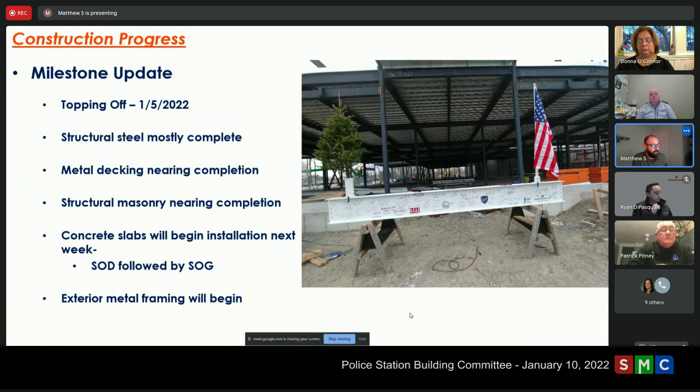And then, as Neil had pointed out, slab on deck will be following next week, and shortly after that, the slab on grade will be completed as well. Running concurrently and just behind that is the light gauge metal framing, so you'll start to see the bones fill into the skeleton over the next few weeks, and it'll start to really take shape as a building. Once those pieces are complete, the finishes will start to go on - insulation, exterior cladding, waterproofing, and the like. So this will be getting closed in pretty soon.

Just as a quick note on the construction progress - just over 5.8, just under $5.8 million so far. The construction contract has been completed as of the end of December, and that represents about 20% of the construction, so we're about one-fifth of the way from the building completion - the overall construction project, not just the building itself. Still tracking no delays to the schedule. We've had really good weather, so that's been really helpful and beneficial to keeping the project moving forward and on track. We also have no change orders to present this month - last month we had change order 1, and we don't have another one to present to the committee this month.

Just as an anecdote, a little bit of what we've been doing behind the scenes - we're just over 350 submittals and shop drawings that have been completed to date, and 68 RFIs have been reviewed and processed to date as well. So there's not a whole lot outstanding at the moment, but we've been pretty diligent about making sure these are getting processed and closed out. There's been a lot of work behind the scenes to keep the construction moving forward.

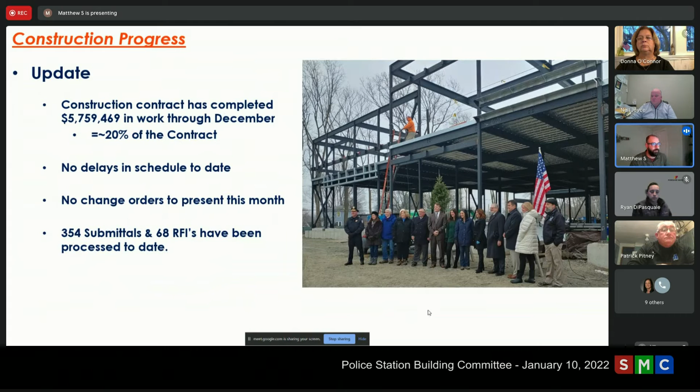Just a quick walkthrough through some of the progress so far. This is as it was just last week, right after the topping off ceremony. And this is the front of the building.

Structural steel is mostly completed. The elevated deck is installed and being prepped for concrete. Over the next week or so, most of the trades will be making their penetrations and blocking that out so that the slab pours can begin.

Some of the things you're seeing here, the steel that's hanging off, this is some of the precast supports. We had some precast detailing around some of the larger windows, and these are the shelves that'll be carrying some of that material around.

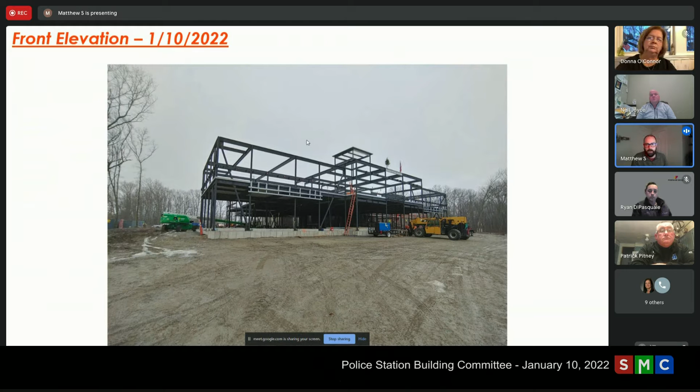And then the light gauge metal framing, as the infilling of the structural steel occurs, they'll also be doing the light gauge roof trusses as well, and that'll start to fill in the roof structure above.

Taking a walk inside the building, we've shown this area a few times in the updates, and again, this is the dispatch area, one of the more heavily detailed and coordinated portions of the building. You can see by the amount of pipe that's poking through where the slab is going to be that there's quite a lot of conduit, data, and power going into this area. It's one of the more heavily coordinated portions of the building.

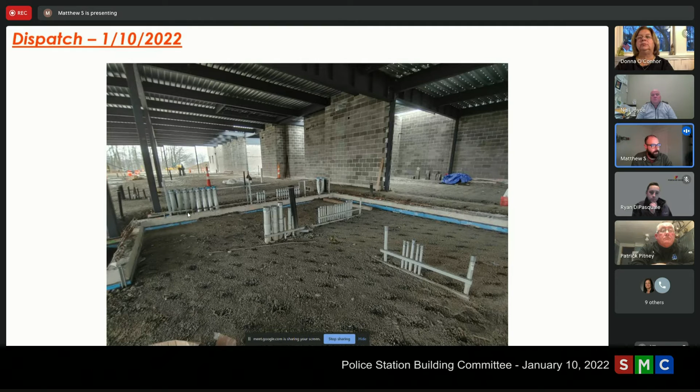You'll notice the foundation walls running inside the building here, and that's because we have that depressed slab in the dispatch area, so we can have that raised access flooring. That's why you're seeing this sort of drop in the foundation here.

Just looking off to the right, this will be infilled with walls eventually, but this is essentially where the evidence storage area is going to be. Again, communications equipment and dispatch here.

This is the edge of the elevator pit, and then just beyond that is the stair that goes out to the north portion of the site where the plaza is going to be, and the training room. This area here is the evidence storage and receiving area, and then there's a small electrical closet here as well.

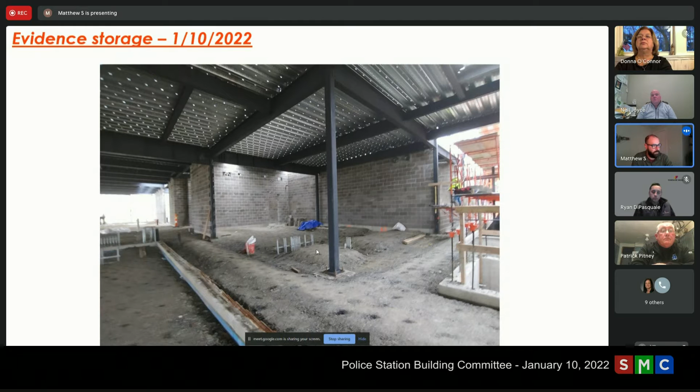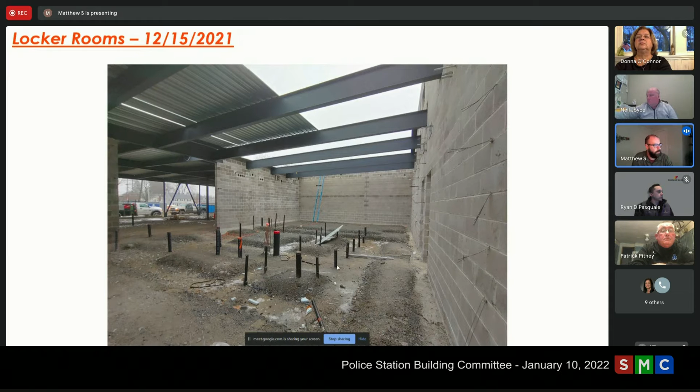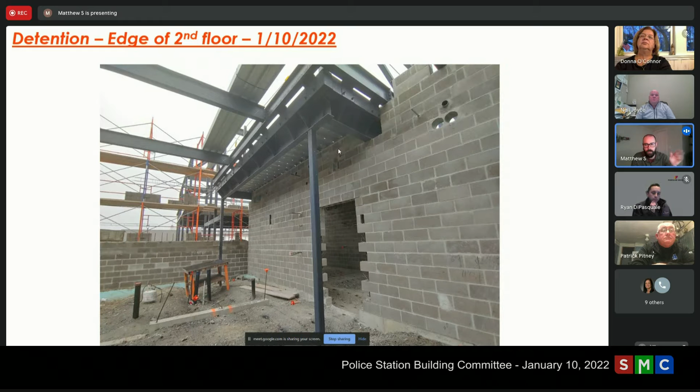This is just an interesting detail that you'll only get to see at this point in construction, but this is the detention area here. And this is actually the edge of the second floor portion of the building that's just poking out here. This will eventually be all covered up, but it's an interesting detail.

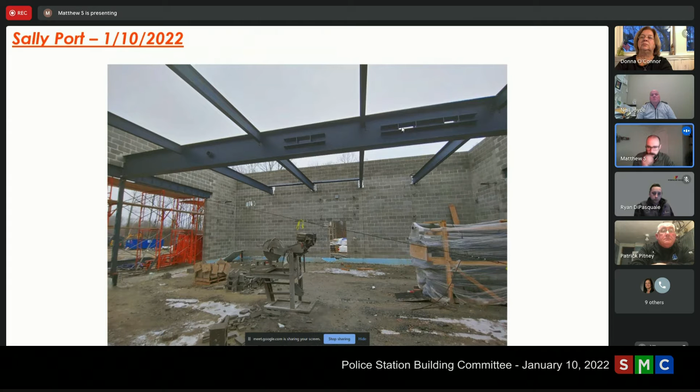The back wall here is where we have a small radio communications network room that's going to be taking the cabling from the tower and bringing it into the building. It's big coax cable, so we'll land that as soon as it comes into the building, and then that'll transfer back through these penetrations as Cat 6 cabling, heading down to the comm equipment room. That's how a number of the radio communications will be coming into the building.

On the other side of the building, in the other garage, we have a number of our utilities entering there as well, so this is the rough-in of those utilities being coordinated here. We've got our water service coming into the water room, and this is where the fire protection system will get tied into the building. Water will be tied in as well.

And then back here is where our main electrical service room is, as well as the emergency electric room. This is where the primary service is landing in the building, as well as where the emergency generator service will be tied in.

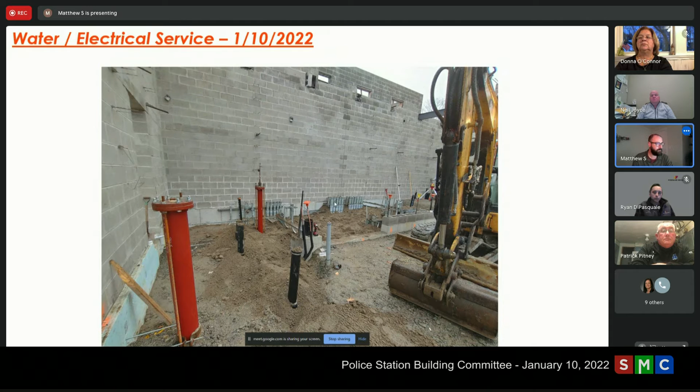And then on the upper floor, this is on the second floor, looking about where the locker rooms are going to be, looking towards administration and dispatch off to the left. Oh, I'm sorry, I'm actually backwards. This is looking from the administration off towards where the lockers are going to be.

You can see the second story, or the 1.5 story masonry construction in the back here. That's the fitness area, that's where the fitness area pops up, and we have the clerestory windows that go around the perimeter. And then this is the structural framing for the cupola that'll be over the detectives bureau.

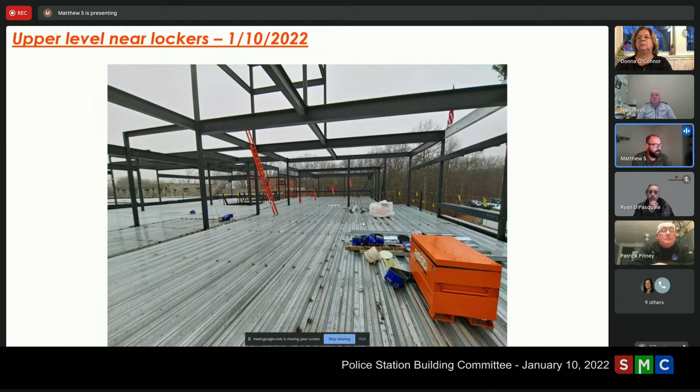That's it for an update on the construction, and then just real briefly, just an update on the ball fields and egress drive. So as we had noted at the last committee meeting, a group of us were going to meet on site after the topping off ceremony just to take a look at some of the existing conditions over where the exit drive is going to be.

In particular, we wanted to look at, there's an existing fence line that runs through here, and an old chain link and barbed wire fence. And then we just wanted to sort of get a sense, of everyone looking at it, where a lot of these pieces and parts are going to be located.

And what we ultimately landed on was maintaining the drive coming out and staying as far back to the property line as it can, while also maintaining the 100-foot wetland buffer that we have off the back of the property. And then also bringing in some additional parking off to the back of the site here, just to help offset the parking congestion that they have during the summer and spring when soccer season's in full swing here.

So this is approximately where we would suggest that parking area, and we would suggest that that's also a gravel parking lot with a couple of paved spaces just for handicap parking. Again, just to mitigate any impacts on stormwater for this piece of the site.

A couple of things we did discuss with this is one, adding a 4-foot high fence between what will become the parking area and the ball fields to the south, just to help prevent some soccer balls being kicked over and hitting any of the cars or anything like that, just to give a little separation and protection there.

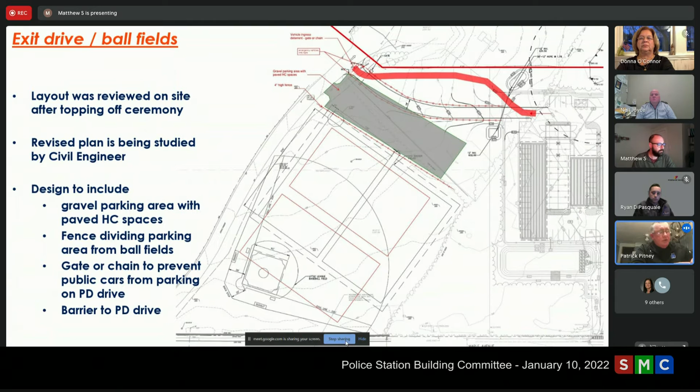I had one question on the concrete pour. We're entering colder weather now. What effect does weather have on pouring those slabs on grade and on the second level?

So it does have an impact on that. There's cold weather concrete procedures outlined in the specifications, as well as Fontaine Brothers have submitted their proposed cold weather concrete procedures for approval. They've been reviewed by us internally as well as the town and have been accepted. Ryan, I don't know if you want to go over those procedures.

Yeah, so generally the key to success when pouring slabs or any concrete in cold temperatures is making sure that your concrete doesn't freeze in the initial curing period. So to do that with the elevated slabs, we're going to be utilizing propane pot heaters, as well as tenting in the ground floor of that 2-story area.

So if you drive by the site in the next couple of days, you'll see white flame retardant tarping going up around the exterior of the building, and we'll be putting pot heaters up on stands to get them closer to the deck, and we will preheat the metal deck as well as heat the slabs once they're placed for the period of time that is recommended by the American Concrete Institute.